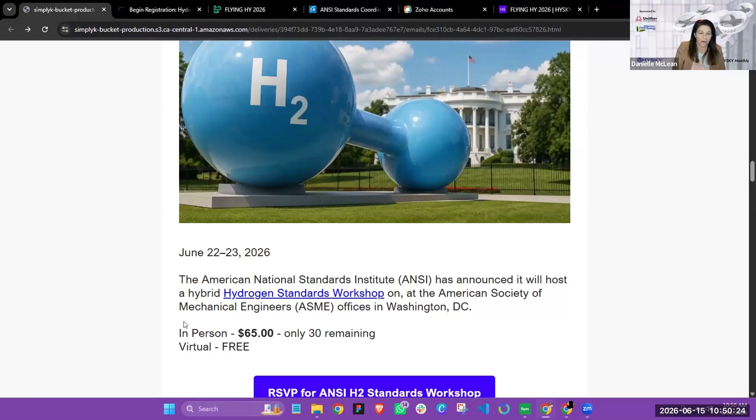Last week, I had the pleasure of interviewing Val Miftakhov, former CEO of ZeroAvia. And in that interview, we talk about a lot of wild things, but you need to watch the whole thing because in the beginning we talk about why he left ZeroAvia, and in the end we talk about what would be different, and he gives specific things that Christine, I even think there's a part of the interview we could use in one of the presentations.

It's towards the end, but he talks about the company basically moving all their operations to the UK, and why, and it gives the United States a very good roadmap on what we can do here. It's short, we only talk about that for maybe 5 minutes towards the end, but I think it would be extremely valuable to hear where they've not really had success and where they have had success, and why. That is something to consider.

We also talk about some funny stuff in here, so it's one of my favorite interviews that I've done. Let me just get you, well, you have this link, but I'll just give you that link.

I can share this with Christian Thiele of SAE International, who'll be moderating the end use applications discussion. And I see David Frank is on as well. So I can make sure maybe Christian will have some ideas on how he wants to carve that in. And it could even be like just a discussion part, maybe it doesn't have to be part of the official agenda, but I wanted you guys to see it prior to the event, so you could even just touch on a couple points.

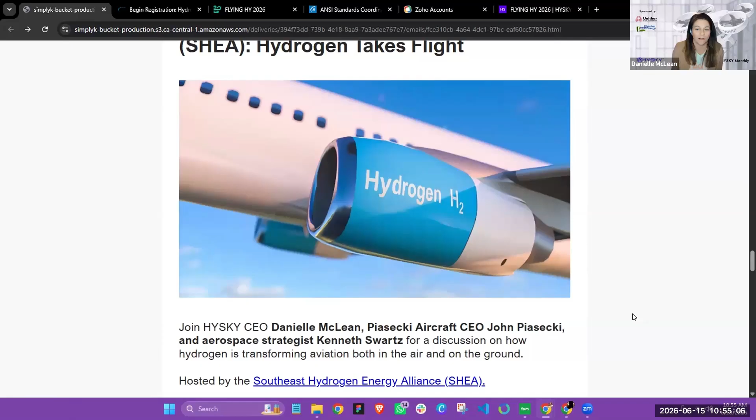But on my 50th birthday, I'll be giving a talk with John Piasecki and Ken Swartz, who also, I believe, is here. And that's going to be a really exciting conversation. Ken's going to talk about what he experienced with United Therapeutics, who's done some really cool stuff. First piloted hydrogen helicopter flight, and all sorts of things that he learned there. So it will be kind of the exclusive on that. And that is on June 18th, this Thursday.

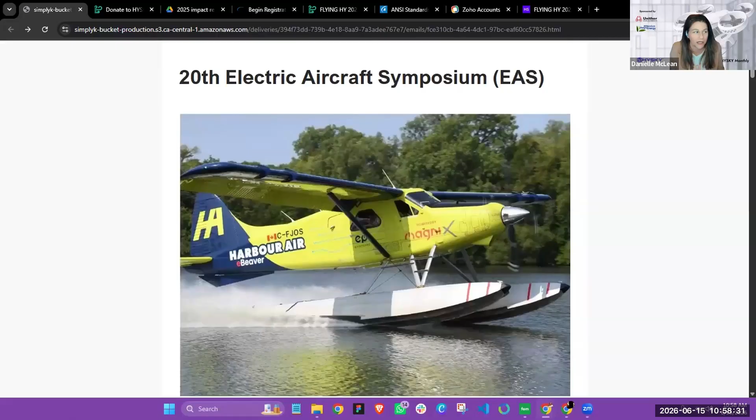Okay, so now I'm going to scroll back up to the top, and that is the end of my spiel. And I will pass it over to Mike. Mike, I'll continue to share. So you can start with EAS and then our speakers for today.

Yeah, so as Danielle showed before, we're doing the 20th Electric Aircraft Symposium. Ken Swartz is really the brains behind it.

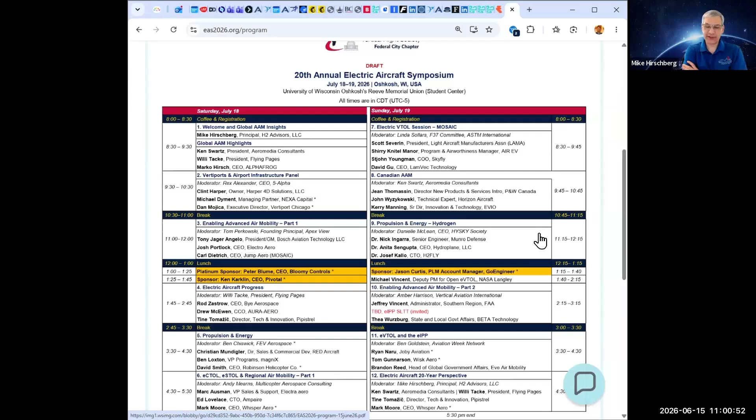And I just want to highlight the program here. This is the online program. We've got this session on Sunday morning on hydrogen that our fearless leader Danielle will be chairing. Nick Ingarra. We got 3 PhDs on this session, so it'll be really great. Anita Sengupta, the CEO of Hydroplane, and Josef Kallo is coming over from Germany to talk about H2Fly. And we've also got some other great stuff.

We've got David Smith, so he'll be talking about the Unither Bioelectronics hydrogen helicopter and also other work that they're doing. You'll see here that Ben Chiswick from FEV Aerospace is chairing that session. And should I go ahead and transition into my intro of our featured speakers, Danielle? Yep. Okay, great. I didn't intend for that, but it just worked out really well.

So yeah, truth in advertising, to state this relationship. I met Ben a couple years ago and was really impressed with the work that FEV does. I'm an aerospace engineer, got a mechanical engineering degree, but I've always really been interested in propulsion, combustion, heat and mass transfer. So this was really a match made in heaven for me to be consulting with FEV. Ben and Satyam will be talking about the past, present, and future of FEV. But I'll give you a little bit here because I'm a nerd, so I like the story behind the story.

They're based in Aachen, Germany, and I know everybody knows Aachen as the seat of the Holy Roman Empire. That's where Charlemagne, or Karl the Great, had the seat. And there's the university there. In English, it's called Aachen University. They developed this combustion research center and spun it out into FEV. Okay, here comes nerd alert. Originally, it doesn't stand for this anymore, but it stood for the Forschungsgesellschaft für Energietechnik und Verbrennungsmotoren, which is a research association for energy technology and combustion engines, which really sums up the basic work they did.

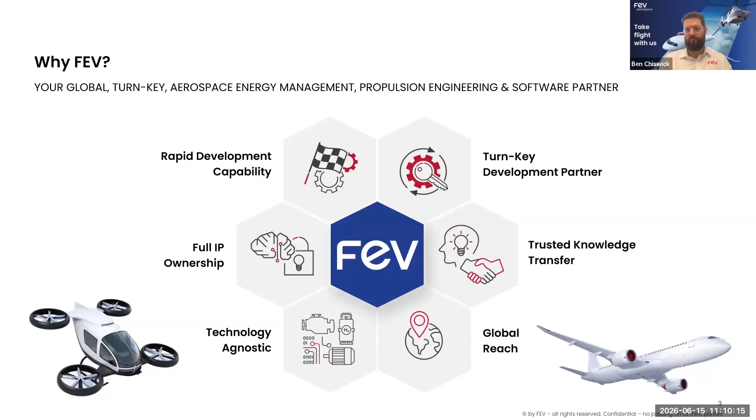All right, this gives a little bit more detail of where we're specifically at in FEV North America, where Satyam and I sit, up just north of Detroit in Auburn Hills. Lots of golf courses around here, as Mike has sort of alluded to. And here we've got around about 400 employees. So we're the biggest campus outside of Aachen, Germany, meaning that we can really deliver across our full range of capabilities of the group, but locally.

Very importantly, we've got about 100,000 square feet of development, test, and prototyping space. That's split across 4 different buildings locally here. And again, flexibility is really the byword there. So we're not a traditional, let's say, test house where you will issue us a test procedure and say, here's my transmission, motor, engine, whatever it might be, go test.

We very much exist in that space where it's the first time that a system is coming to life or the first time it's being integrated into a broader system or with its partner subsystems. And inevitably something's going to go wrong, something might fail, integration issues. So we carry the engineering expertise around us to be able to problem solve those, root cause those things, again, to be that development partner.

This gives just a little bit of a sense of the very recent past. As Mike kind of suggested, we've been around for nearly 50 years now, but FEV Aerospace as a brand is quite new. We've done aerospace work for quite a number of years, but recognizing that we wanted to grow and make aerospace a really strategic focus for the company, we decided to start our own brand and give it that focus both internally and externally as well.

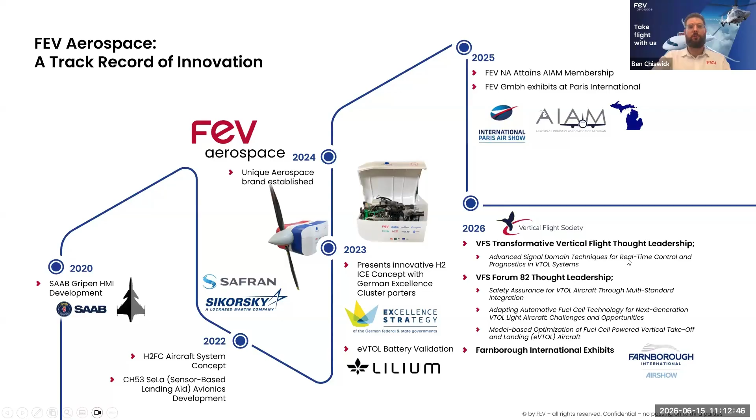So we have a consulting team within the FEV group. Actually, just this year they were nominated by Forbes as one of America's best management consulting firms, that we're quite proud of. But they really help customers with their product strategy initially. So I say we can do a clean sheet, but it's a case of how big is that sheet of paper? What shape should it be? How should people position themselves in the market before we then go and engineer those systems through the normal V cycle?

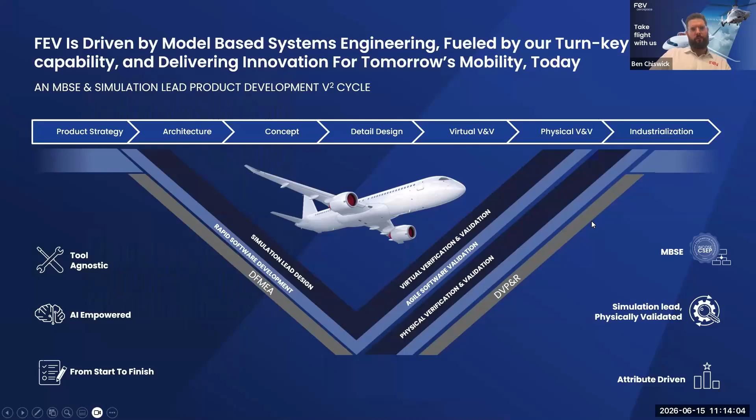Out on the back end, they're doing a lot of operational consulting, helping people with supply chain, helping people set up their sourcing as well. So overall, that gives you a bit of a better sense for how we lay out across the V cycle. Okay.

Feel free to get some water if you need to. Many of us are recovering from illnesses, so it happens. It's all right. I'm on the upswing.

Okay, coming on to what do we actually do within that services world. So it's really divided into 6 pieces. Number 1, electro-hybrid propulsion engineering. So that's really anything and everything motor, power electronics, battery, or integration thereof. Then next, strategic and technical consulting. That's delivered by the FEV consulting arm that I was just speaking to a little bit.

Systems engineering is a huge part of what we do, and I'd already described a lot of the different disciplines that we operate across. So naturally, when we bring multiple of those to a larger program, we have to bring systems engineering to the party as well and really be expert in doing that so that we can integrate across all of those things. And in some cases, we're brought in to be systems engineers for our clients to help them weave their products, programs together, or in some cases, put in systems engineering processes and tools. Also, under that heading, we cover cybersecurity analysis as well, and some functional safety work and support.

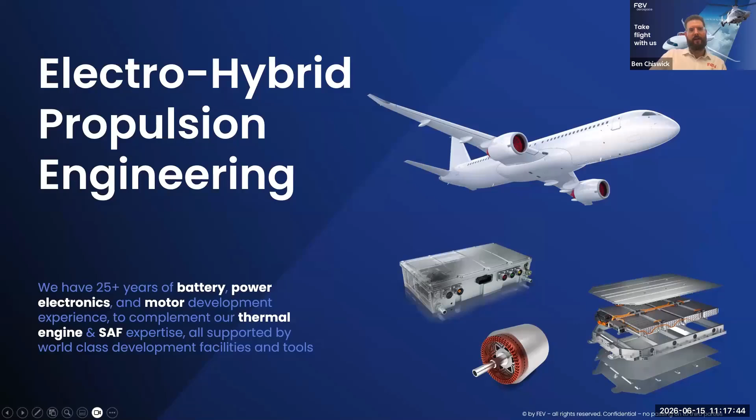I did want to touch on the hybrid propulsion engineering and give everyone a bit of a flavour of that, as it's sitting downstream of the fuel cell. Number 1, battery engineering is a huge focus point for us. So FEV Group actually designed, built, owns and operates the world's largest independent battery test facility, which is located in Germany. So again, that's something we're quite proud of, and it gives us a really powerful not only validation capability, but prototyping capability as well.

So we can do all of the destructive testing that we need to, all of the really difficult niche tests. And that facility also allows us to do very low rate production to bridge between the 3, 4, 5 quantity prototyping and the hundreds that the battery pack suppliers or battery cell suppliers really want to support. There's a little bit of a gap in the middle there, and we often find ourselves positioned in that.

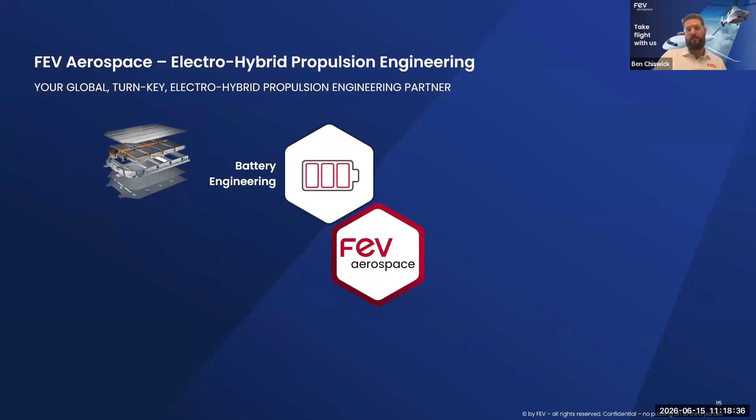Next, copper bird testing. So, really all of the systems that I'd already covered. So whether it's battery, motor controller, inverter, DC-DC converter, motors, we have to do copper bird testing. So being really the glue that fills different gaps that people might have, whether that's in plant modeling, physically setting up multiple motors under test, or motor durability testing, something we're really well positioned for.

The integration of all of these things together is something that we have to do an increasing amount of. Certainly when we think about hybrids, small piston engines together with electrified systems that we're seeing more and more, we have a foot in both camps. So that gives us an ability to not only understand all of those subsystems at a very deep level and plug gaps that people might have in their expertise, but how we integrate those together. It's not fair necessarily to consider system integration as its own discipline because it's interwoven into everything, but equally it deserves its own call out. We see a lot of people have issues there, so we find ourselves called upon very frequently for that.

Sustainable fuel development is something we do a small but growing amount of, particularly in our European base. So we're really well plugged into the Oil and Gas Climate Initiative. So we work with all of the usual major oil and gas suppliers that you might imagine. And really a lot of that comes from our strong lineage in combustion engineering.

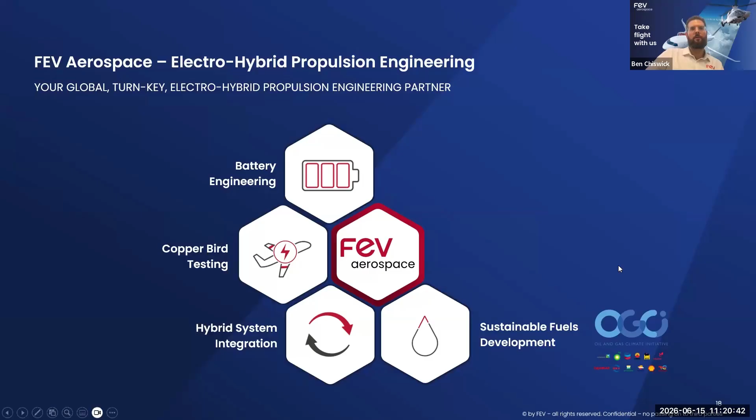As those stakeholders are looking at developing sustainable aviation fuels, it gives us a natural position to help them, whether that's on the consultation side, looking at market analysis, or on the actual fuel development and implementation side too. It's a very small piece, but I'm quite excited about that.

Motor development, of course, makes sense. Then finally, power electronics—again, almost an integration piece. You find a lot of people trying to find COTS systems that either won't integrate well or won't get optimal performance, so we're called on for power electronics quite frequently too.

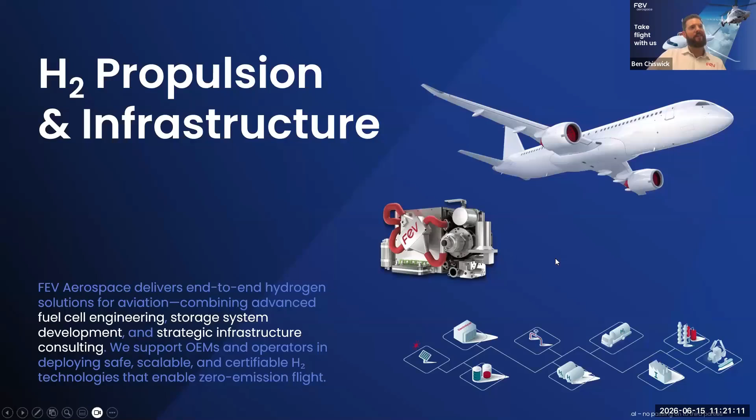All right, getting on to the main event: hydrogen propulsion and infrastructure. What do we deliver here? I know this is a format everyone will recognize, but it's really to underpin how committed to hydrogen FEV is. The reality is we've been operating in the fuel cell space for probably 20 plus years, automotive to begin with.

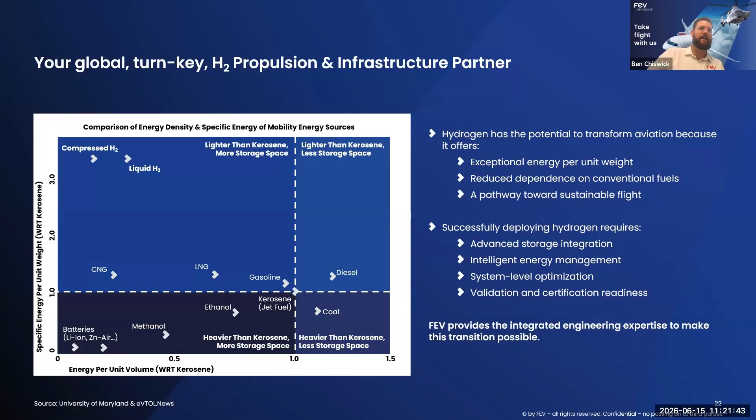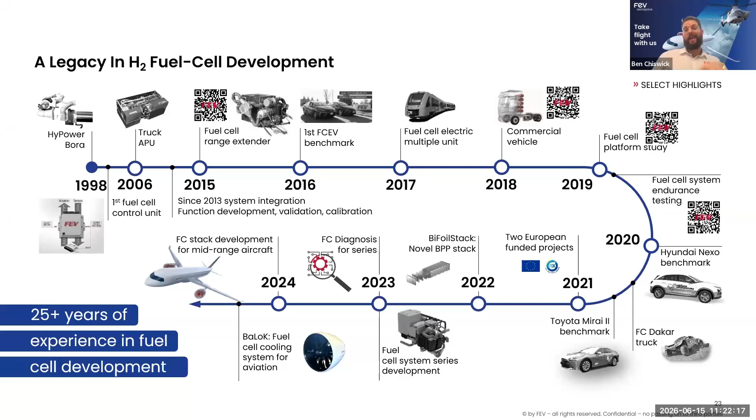So again, a very broad set of expertise across different sectors. Working across all those sectors, exposing us to different tool sets and constraints and ways of working, means we can carry learnings from one sector into another, giving us a much more improved, rounded offering.

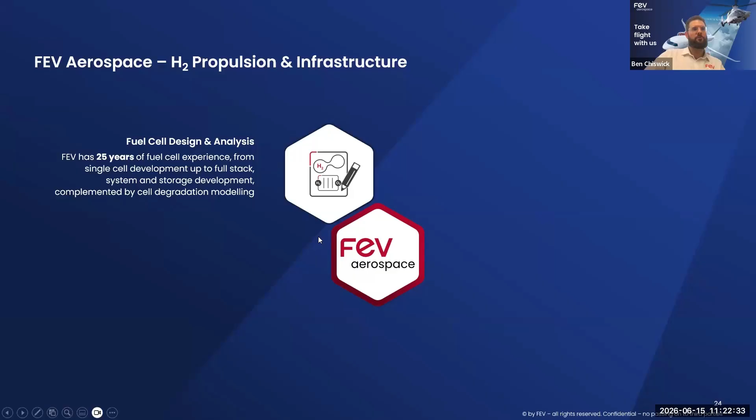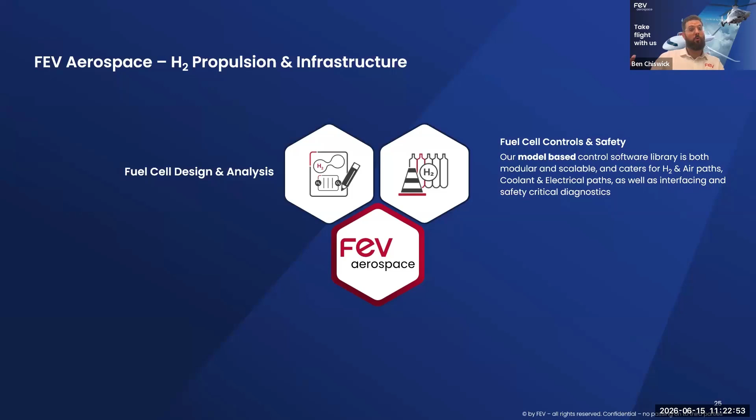Fuel cell design analysis is a big part of what we do and have to deliver. Rounding out our hydrogen offering, fuel cell controls and safety analysis as well. The software piece has to go hand in hand, and we carry a model-based controls software library across much of what we do. We can leverage that to get people to a first operational prototype much more quickly, with lower risk and in many cases lower cost. It just helps us deliver more effectively.

Of course, fuel cell development testing with our global network of development facilities amongst all our subsidiaries. We have a global network of hydrogen-capable test facilities that underpins really all of what we do.

Fuel cell integration involves storage, plumbing, packaging, and supervisory controls of the storage as well—things which often get treated as secondary issues compared to the fuel cell itself. We're really well versed at engineering and integrating those into vehicles, so we're called on quite frequently for that.

Something people don't really know us for yet is hydrogen electrolysis, which is also part of what we do. We have an energy and resources team who essentially do the stationary versions of everything else in the company—stationary battery energy storage, electrolysis as well—and that rounds out our hydrogen offering.

Last but not least, looking at ecosystem development and infrastructure, underpinned by our consulting colleagues—looking at the business side of how the hydrogen ecosystem needs to work going forward, where the weak points are, and ultimately helping our clients position themselves not just for today but within that future ecosystem.

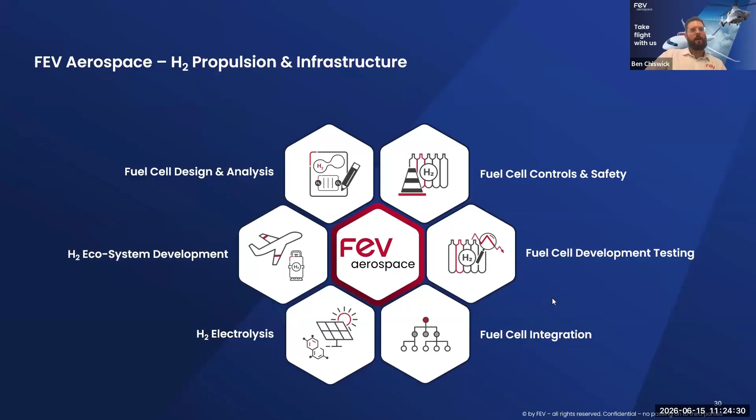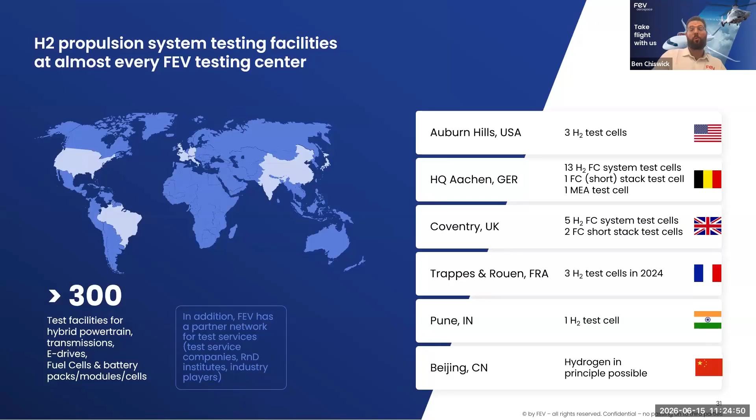That being said, we'll nearly get to the interesting part with Satyam. But beaming this up as just a quick example of some of where we have hydrogen-equipped test facilities right around the globe. We're only going to see this grow as hydrogen grows and the call for that kind of work from within FEV also increases.

The last one from me is really to collect together several pieces I'd already name-checked. We're experienced across a whole number of vehicle types—heavy duty, aerospace, non-road machinery, light duty, passenger car (of course our lineage), marine, rail, stationary—all sorts of different propulsion systems, with a number of different fuel cell systems developed from scratch. Benchmarking and testing is also a big part of what we do, whether cost benchmarking and teardowns or performance benchmarking. So we deliver a very rounded service there, which helps our consulting team position customers where they want to be.

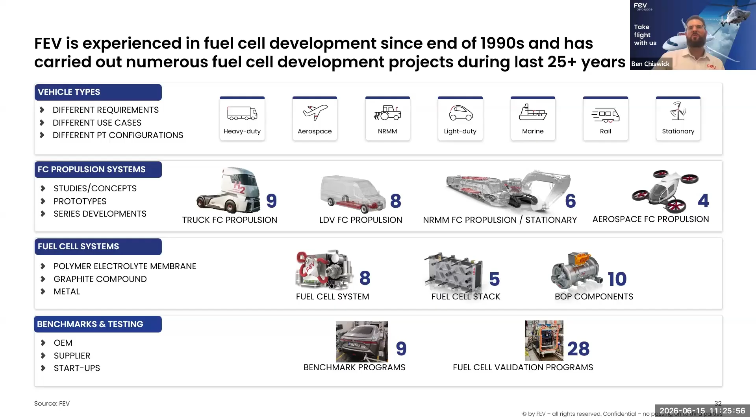So it's not just a case of here's what the technology roadmap looks like, but here's the roadmap supported by the technology that's incumbent today and how that's all operating, what the cost points are, what its availability is, and what its performance is. And of course, validation programs as well.

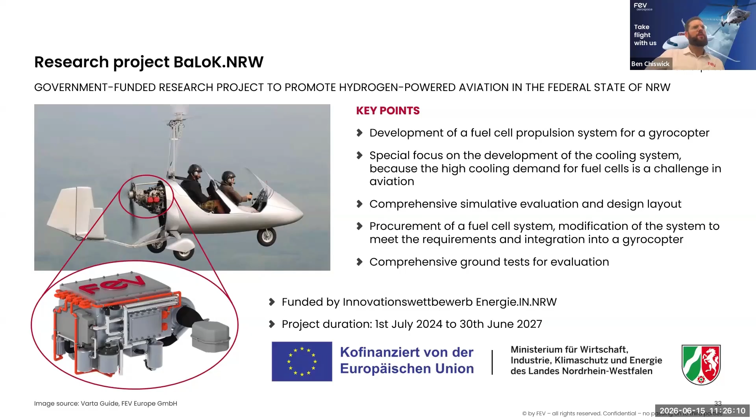So with all of that being said, I'll round off now with a couple of examples. I'll flick through these quite quickly. We'll just see a few different case studies of things that we do or are currently involved in.

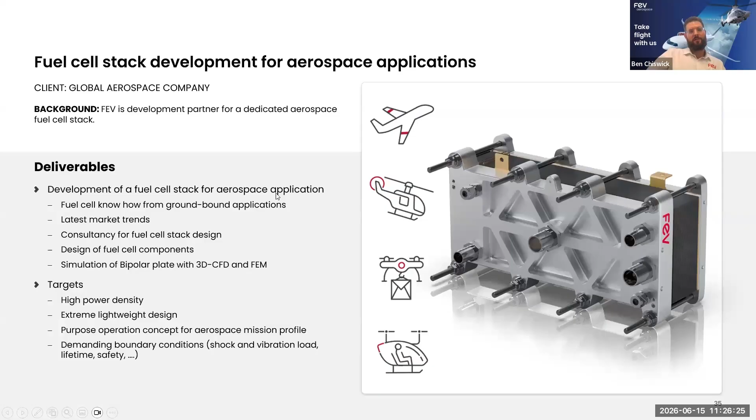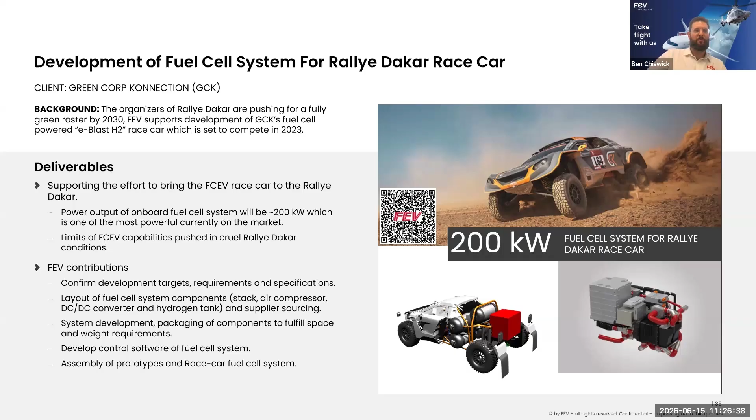I've actually done a fuel cell for the Paris-Dakar Rally, so of course this is quite close to my heart, being from motorsport. But again, it just shows you the breadth of what we do.

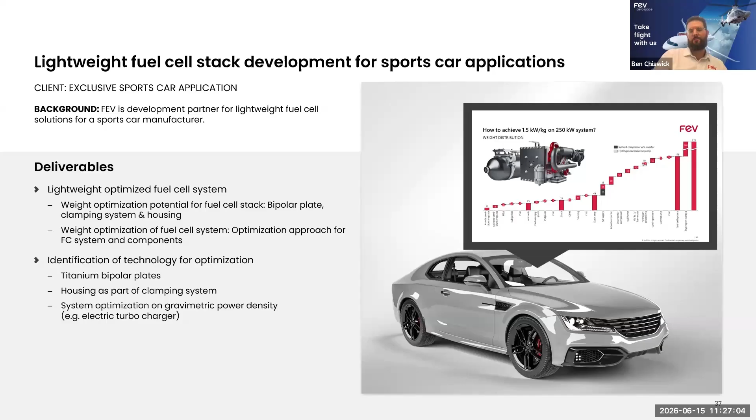And then equally here, an exclusive sports car application, but for a very, very high-end OEM that's in Europe. So again, it just shows you the full breadth of what we do. And again, not a huge lineage necessarily in aviation hydrogen, but it just shows you the range of different problems that we've tackled and ultimately the tool set and experience that we've got to bring to bear to tackle those.

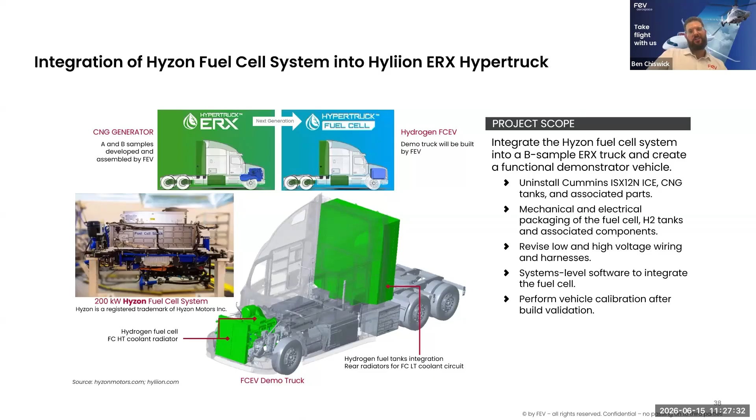Last but not least, this is an example of an integration program that we can share with a company called Hyliion that we did a lot of work with here in the US, where we converted a fleet of their trucks to hydrogen fuel cell and did all of the surrounding subsystems for them, all of the vehicle level validation, and again, kind of shows you around the hydrogen storage system and controls and how we operated and worked.

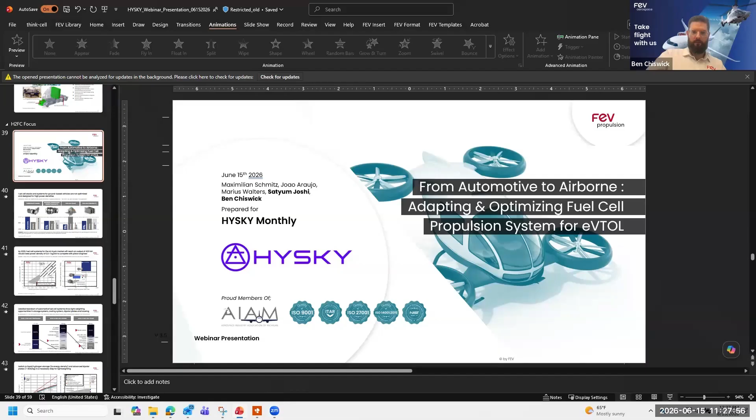Okay, alright, yeah, first of all, thanks Mike for the kind introduction. I do want to recognize my colleagues who actually were the lead authors for some of the content that I will be showing today. Max and Joao, they worked hard on some of the work that we did with regards to the specific adaptation of automotive fuel cells into propulsion systems for aviation applications. And we also are highlighting that it's not just adapting, but how do we optimize? So there's content that I will be showing on not just adaptations, but then how do you optimize the system for aerospace applications?

So let's start here with what are we competing against. So we've got turboshaft engines, really high in power density, acceptable level of efficiency. And then you have internal combustion engines, or piston engines as we call them, slightly more efficient, but not as power dense, work really well in that 200, 300 kilowatt power range. And at a specific power level, they tend to be a little bit more efficient.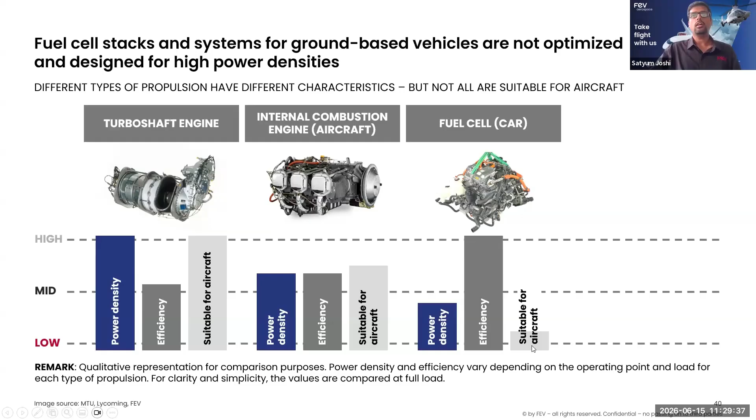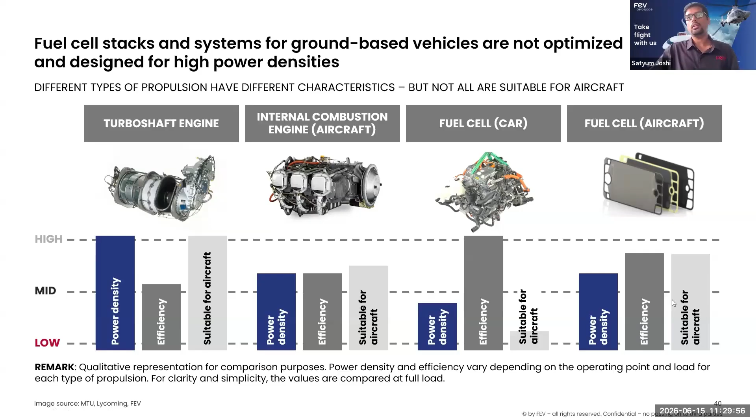So if you compare those two against what automotive fuel cell systems are, the automotive fuel cell systems are very low in power density compared to these two propulsion system options, but obviously quite a bit higher in efficiency, not really suitable for aircraft application. And what we're trying to get to is a target of at least a similar power density as the piston engines with better efficiency. So that's kind of the goal of some of the work that we've been doing, and how do we make these more suitable for aircraft applications.

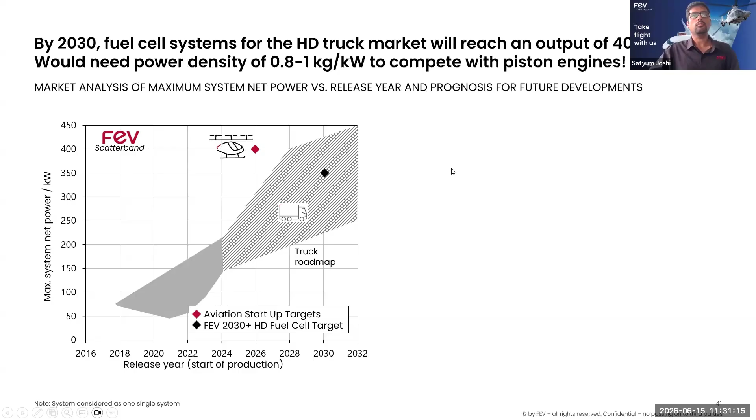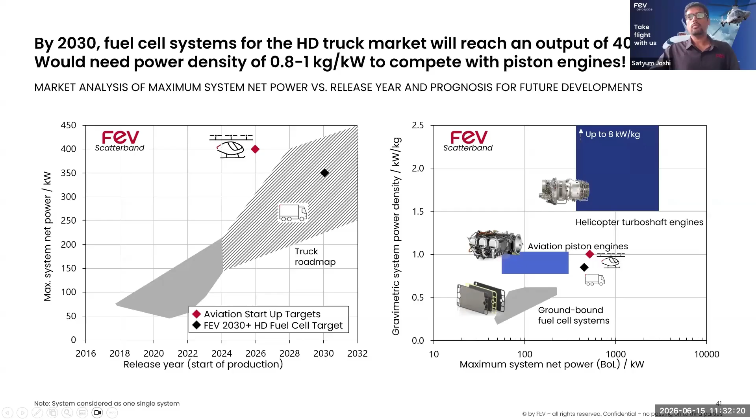Okay, so we want to get more power density. Let's start with where the weight is coming from for a fuel cell system.

We did teardowns of multiple fuel cell systems in the automotive space, and we picked the one that was the latest technology. It was about a 100 kilowatt fuel cell system, 125 kilowatt stack, and that weighs about 357 kilograms along with its hydrogen storage system. If we look at the breakdown, the fuel cell is 60%, the storage system about 40% of the total weight.

If we break down the fuel cell system into its different components, the stack assembly is the biggest contributor, followed by the cooling circuit and the cathode system, which is the air side, as the top contributors to the weight.

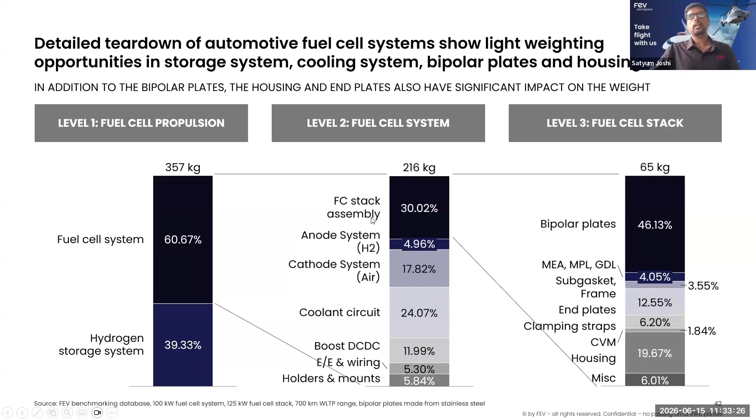If we further break it down and look at the details within the stack assembly, you have bipolar plates contributing 46%. Another big hitter is the housing itself, and then the end plates and frame.

So we looked at this and tried to understand what are the low-hanging fruits, where can we optimize the most. We identified the hydrogen storage system, and I'll talk about how we address each of these: the hydrogen system, the thermal system or cooling system, the bipolar plates, and the housing design. These are the key focus areas in all the projects we've been working on to get more power density by focusing on these subsystems.

Starting with the storage system, it is relatively straightforward. Most automotive, heavy duty trucking, or even some locomotive applications were using compressed hydrogen. Some of those applications have also transitioned to liquid hydrogen storage, so that would be a rather easy step to do—move to a liquid hydrogen storage system, still operating in that 1 to 10 bar range. One challenge, of course, is the boil-off and some losses due to that, but it's still manageable.

And obviously, the huge power density increase, or energy density increase, you get from just switching to liquid hydrogen storage outweighs that hydrogen boil-off loss.

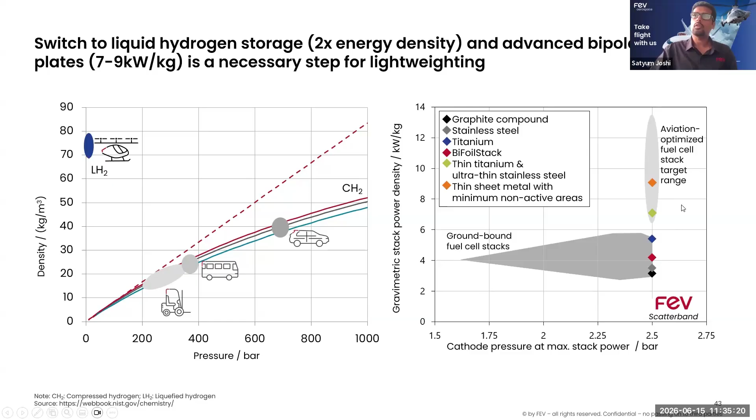The other area I mentioned was the bipolar plates, and what the new technology is there, and how we can get to more lightweight stacks. Most ground systems use stainless steel or some kind of graphite compound if you're looking for more durable stacks. Bifoils is kind of a hybrid between stainless steel and graphite compounds. And then titanium really pushes these systems, improving the power density as well as the durability.

The next step is to then look at ultra thin and thin titanium. These involve more advanced manufacturing methods like hydroforming, and that is how you're able to push these to 7 kilowatts per kilogram power density. Then really thin metals with minimizing the non-active area—so design optimization combined with thin sheet metal combined with advanced manufacturing are some of the ways we believe we can achieve this. The green diamond here is where we have seen some work already, but really the goal is to achieve the target of 9 kilowatts per kilogram.

Then switching to the housing side. Here's a couple of pictures on the housing in the automotive space: the Mirai housing design, and the design from Refire Prisma fuel cell as well.

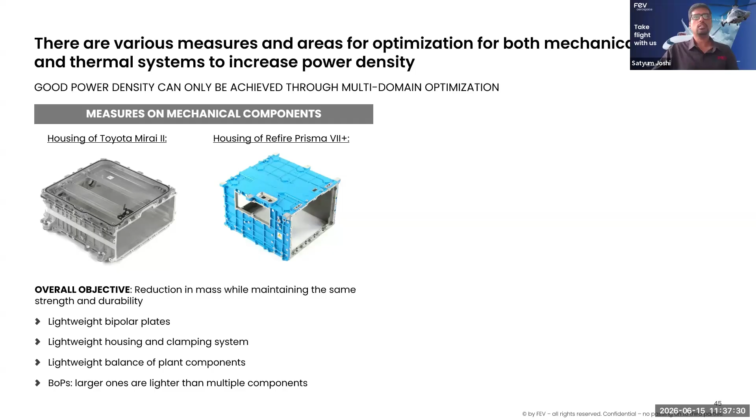There's already, as you can see in that design itself, opportunities for lightweighting and some steps that the OEM already did take. But in general, there's always opportunity for improvement, and we found areas for lightweighting in the housing and clamping system, balance of plant components, and those are, again, just doing more iterations with your design, CFD, CHT analysis, structure analysis to get to more lightweighting.

The other one that's a big one is, of course, the thermal system. As many of you are already aware, fuel cells are unique in terms of how they reject the heat as compared to the piston engines and also the turboshaft engines, where a lot of the heat is carried in the exhaust. Fuel cells have very little heat that goes out through the exhaust, and most of it is rejected into the coolant. So far analysis has shown that it may not be the best way to match the peak power demand to the peak power output of the fuel cell.

You want to oversize the system a little bit to get the best, let's say, trade-off between the fuel cell weight itself and the weight of the thermal system and the efficiency of the aircraft itself. So it's a system level problem and has to be looked at with some tools, which I will talk about in a bit. So here's two charts.

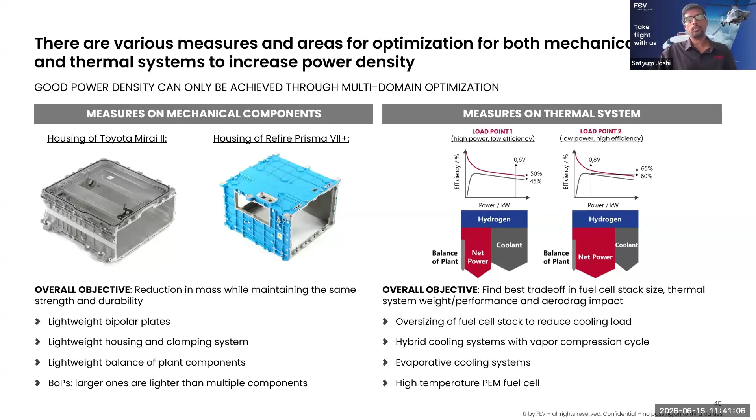So the idea here is how can we scale up the automotive fuel cell and give some of these manufacturers who have been producing fuel cells in the automotive space for many years now a path to provide their products for aerospace applications. Another critical area of adaptation is compressors. So most of the fuel cells in the automotive trucking space are single stage, good for 10,000 feet or so. But as we start to look at some of the higher altitude products in aerospace, you do need a multi-stage charging system, and so that is a major consideration.

But in aerospace that is kind of a must-have to recover the exhaust energy and maximize system efficiency. Okay, so

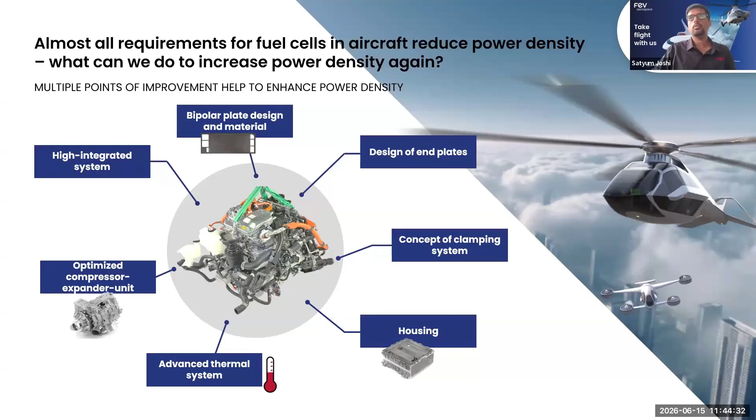Bipolar plate design and material, I talked about that. Along with that, the housing design, clamping system, and end plate design. So these are just fundamental design optimizations, they just need more loops in the new environment, along with analysis. Thermal system, I also touched upon that. Compressor unit and expander unit optimization. So these are all the measures that we identified and would be key to adapting the automotive fuel cell system to aerospace applications. Okay, so that was on the fuel cell level.

If we look at the propulsion system as a whole, it's got two other major components. That would be a battery pack to handle some of the transient loads, and of course the storage system. So when we generally look at these problems, coming from a very research-oriented company, we like to have the right tool set to make sure that we capture all the physics that is happening within all these systems.

Because like I mentioned before, if you just focused on power density of the fuel cell system, you size it small, but if you look at the cooling system impact of that, that may not be the right decision. And then further, the cooling system impact on the aerodynamics of the aircraft, that's also another impact. So the problem has to be looked at on a system level, making sure that you're able to model effectively each and every component of the propulsion system.

So this was a case study that we presented at Forum 82, focusing on how we can set up a multi-physics model of the propulsion system and the aircraft and do an optimization study. And we just did phase one of this. It's got a couple more phases, but it's taking us in the direction of doing system level optimization using modeling.

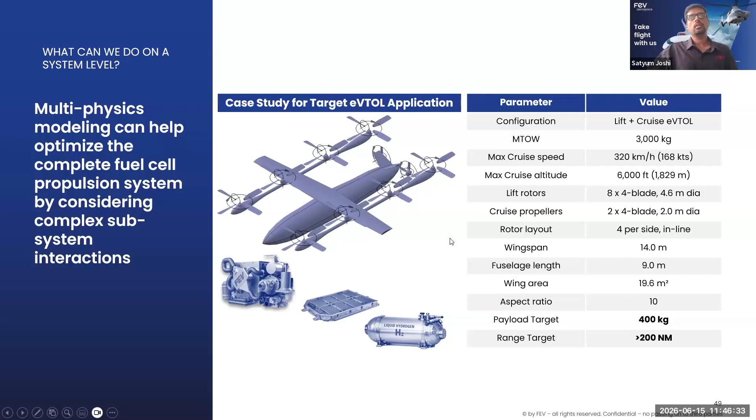So some specs of this aircraft: it's got eight lift rotors, two cruise propellers. We were targeting 400 kilograms of payload and a range of 200 nautical miles, and maximum takeoff weight of 3,000 kilograms. So about a four-seater aircraft, more for intercity travel.

The tool that we developed here was leveraging a lot of our know-how in the other space and taking the tool that is so far the leading candidate, which is GT Suite, and all of the work that we've done with regards to fuel cells and other propulsion systems. On a system level, this is a great multi-physics modeling tool, and a lot of our models are validated against the benchmarking we have done for different fuel systems, e-motors, batteries, power electronics. We have performance models from a range of vehicles and aerospace application components that have fed into this database.

So on the right side here, I have GT Suite, which does all the propulsion and thermal system modeling. And then on the left side, what we leveraged was an open source aircraft dynamics model called SUAVE. That's from Stanford University, and it's available open source. So we tried to link the two so that we get the most realistic or high fidelity dynamics of the aircraft model. And from our side, we have all the details of the propulsion system and thermal system model.

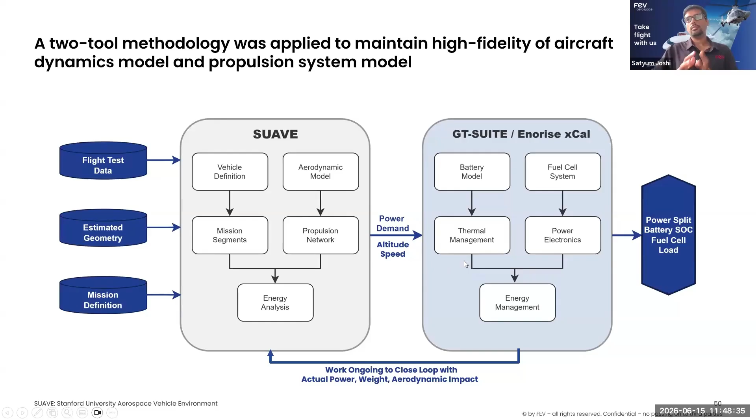Right now, it's a one-way coupling, so you get inputs of flight data, geometry, mission definition, and that feeds a power demand into the propulsion model. And then also altitude and speed, which impact thermal management and fuel cell system operation. But we are working at the moment on closing the loop here so that we can do feedback on actual power, weight, aerodynamic impact. That way, this whole tool chain can become our go-to tool chain for system level optimization. So the first step we did here was make sure that the aircraft dynamic model was validated.

We had some test data available for about a 100 nautical mile route. And here I'm showing power on a normalized scale, so you can see the takeoff portion going up to maximum power on the lift motors, and then slowly transition into the cruise climb phase. And then you enter your cruise phase here with the cruise motors, then descent, and finally do a hover before you land. So those were the different flight phases.

And for each of the flight phases, we calibrated the model so we can match the aircraft dynamics to our test data. And overall, this was a very well correlated model. The specific flight was done at the max altitude of 6,000 feet, max cruise speed of 320 kilometers per hour, about 168 knots. So we're very happy with the aircraft dynamics calibration.

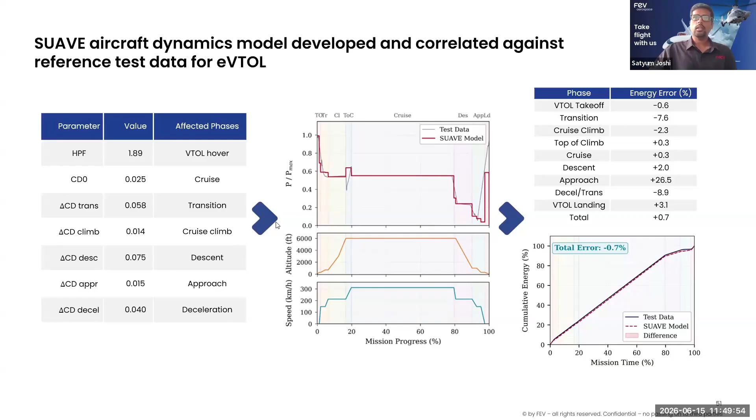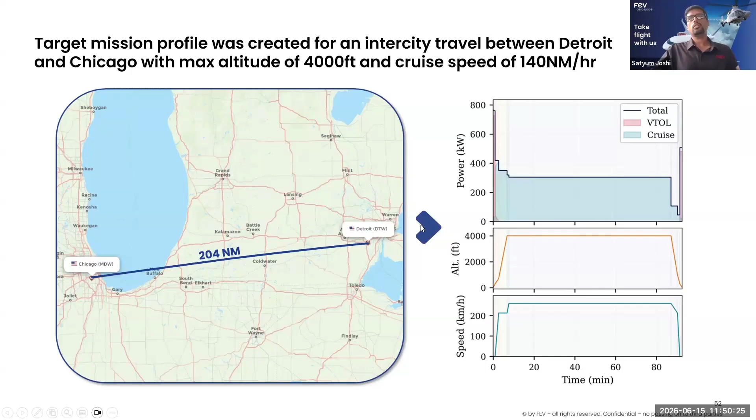We took that same aircraft dynamics model and tried to project what would be a target mission profile for an intercity route between, let's say, Detroit and Chicago. Our goal was to target more than 200 nautical miles, and this was right around that. And using that, we created a new power target profile. So that's very key for doing any kind of optimization. You want to know what your mission profile is, and this is what we then use this tool to predict or calculate for us.

Some more details of the propulsion system model. So it's got all the different elements in here. So fuel cell modeled as semi-predictive. These approaches have come from our years of experience of modeling these components. Instead of getting into the details of solving all the electrochemistry, there's easier ways that are more, let's say, robust and also closer to reality. And that's why we use certain models. So fuel cell, semi-predictive, high voltage battery using a two RC branch equivalent circuit model, motor inverter. Most of this data comes from our own teardown analysis and benchmarking for loss maps, for rotational dynamics, inertias.

BMS, thermal model. So for the thermal model at the moment, we've been using what is called a semi-predictive thermal model, where it looks at the heat rejection and calculates the pump and compressor power consumption. And later on, the plan is to make it more detailed. Energy management controls, so determine how best to utilize the battery pack, how to balance between battery and fuel cell power. So that split is defined by our intelligent controller, and then a pilot model to make sure that we can follow the power request profile.

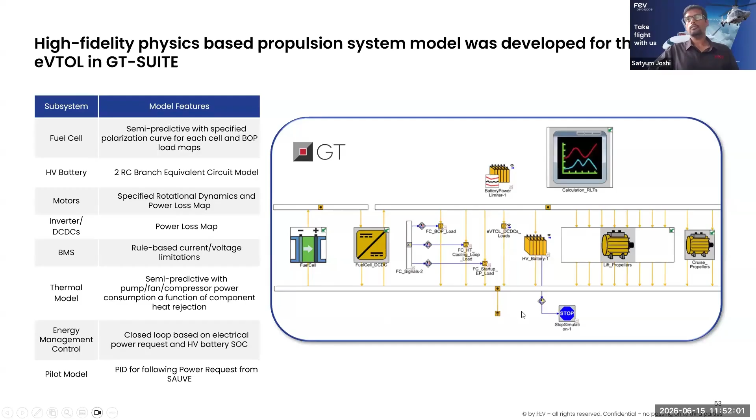Before we got into doing an optimization, we want to understand what's the best architecture or the leading architecture before we get into doing a more focused DOE. And many of the systems use, let's say, an eVTOL platform and try to add certain range extender components. And that would be kind of a battery dominant architecture where you're using a high energy density battery and then adding on a fuel cell system to get more range. And the other one would be fuel cell dominant, which would be keeping the fuel cell as the leading propulsion device and then just adding some battery capacity to handle the transients and manage load transitions on the fuel cell. So that's the fuel cell dominant.

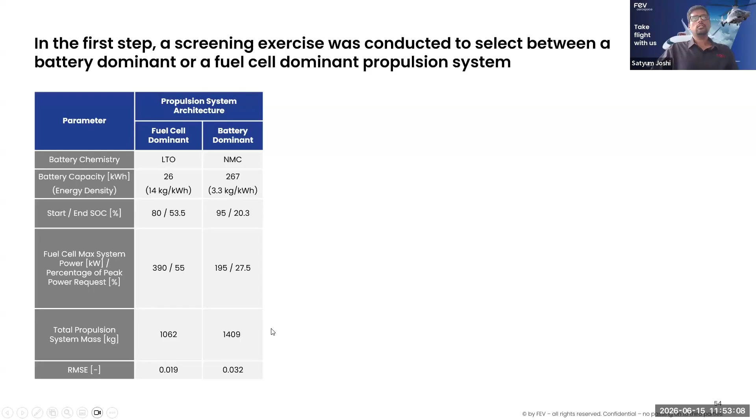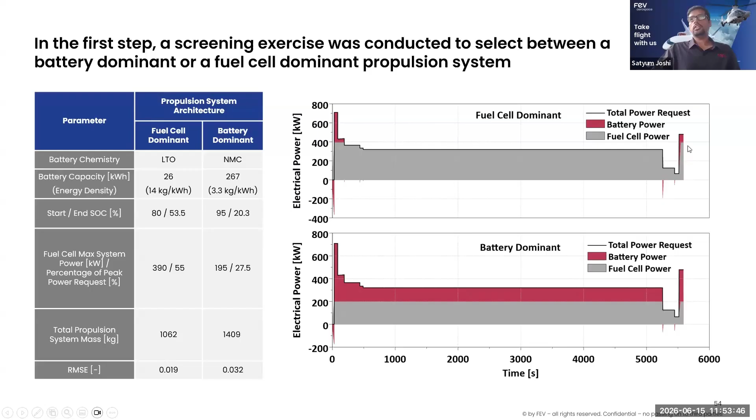And right off the bat, when we looked at the propulsion system mass calculation, there was a significant difference, about 350 kilograms between the two for a given range that we were targeting. And very clearly when we ran the simulations, we saw the same thing. In a fuel cell dominant variant, you're running the cruise pretty much all on fuel cell power. The battery is just there to support the takeoff portion and then the hovering portion before landing. Whereas in the battery dominant variant, you're consuming the battery, and the fuel cell is pretty much running at its best power point the whole time. And this approach is not really favorable from a weight perspective, and that's why we decided to move forward with the fuel cell dominant architecture.

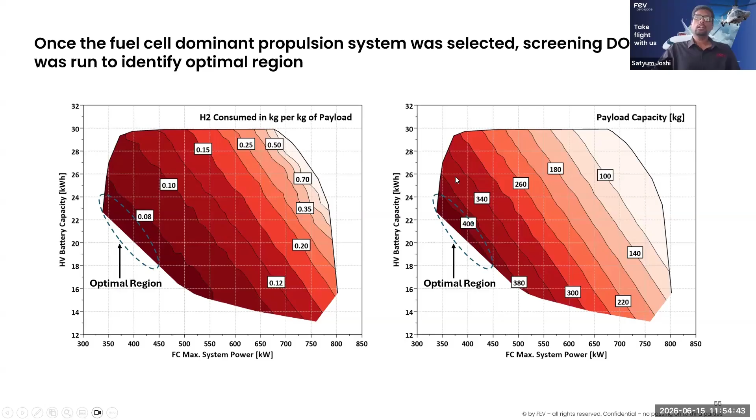So once we figured that out, we ran what we call a genetic algorithm optimization. Just on a high level, I'll explain that it is just a way that our tool allows us to explore the right sizing and understand the different trade-offs that we would see as we're modeling the complex physics of the system. So it's very important to set the model correctly, and then you can, of course, do a lot of these optimization algorithms with it.

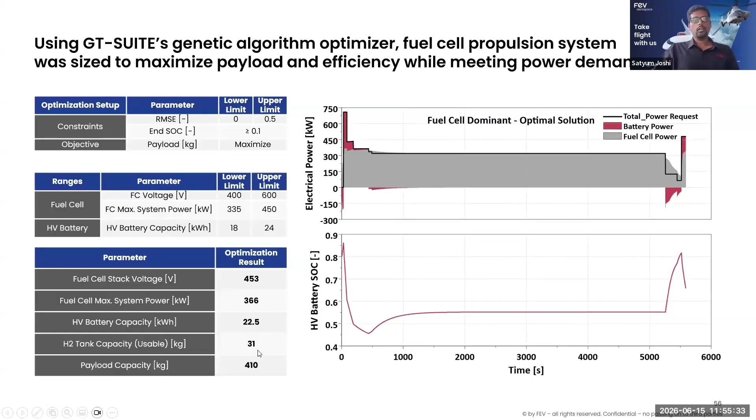And here it resulted in showing that, okay, from a fuel cell perspective, we wanted a stack voltage of 450, max power 366, battery capacity of 22.5, 31 kilograms of hydrogen, and that would give us a 410 kilogram max payload for this duty cycle.

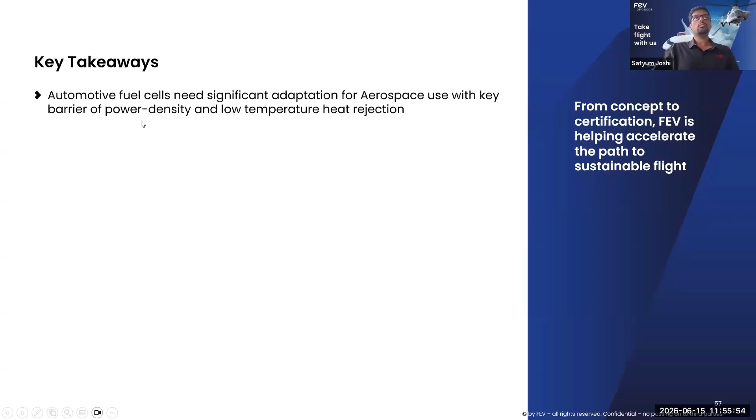Okay, towards the end of my presentation, I do want to leave a few minutes for questions. Key takeaways: automotive fuel cells need significant adaptation for aerospace use, with key barriers of power density and low temperature heat rejection. The key areas we identified for power density increase are storage system, the bipolar plates, housing design, and thermal system.

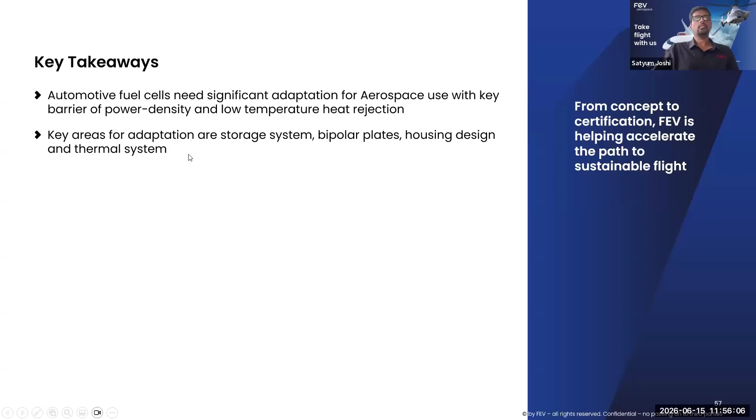You do need to take a holistic approach as you're looking at design optimization. So, like I said before, sometimes oversizing a stack will lead to better efficiency, can lead to a smaller thermal system, lower aero drag. And for the system level design optimization, try to have a modeling framework that captures the details of all that is happening, the aircraft dynamics, thermal system, propulsion system as necessary, and make sure these component models are scaling to your best knowledge and to the specific physical phenomena you're trying to find a trade-off between.

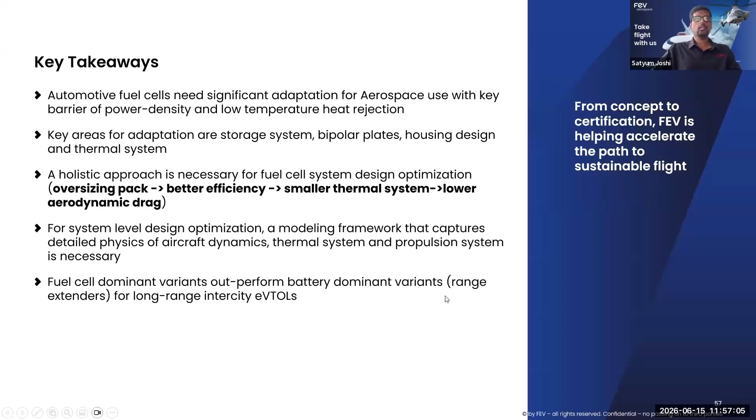And then one of the key takeaways from our analysis was that the fuel cell dominant variants are always outperforming the battery dominant variants, especially for long range intercity eVTOLs. And for a 3,000 kilogram eVTOL, we found that about a 340 to 380 kilowatt fuel cell system size, a 15 to 25 kilowatt hour battery, and 25 to 35 kilograms of usable liquid hydrogen storage is where the optimal is.

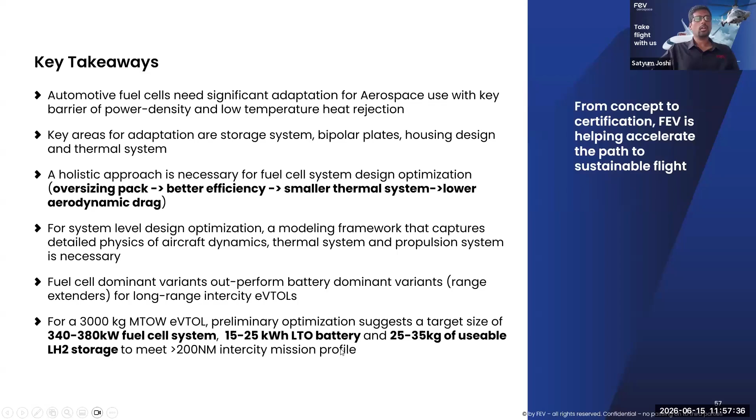And we'll be working on refining this modeling framework to really find that answer: what are the optimal specs of these different components and the thermal system that would go along with it. So with that, I'd like to conclude, and we'll be happy to answer any questions that you may have.

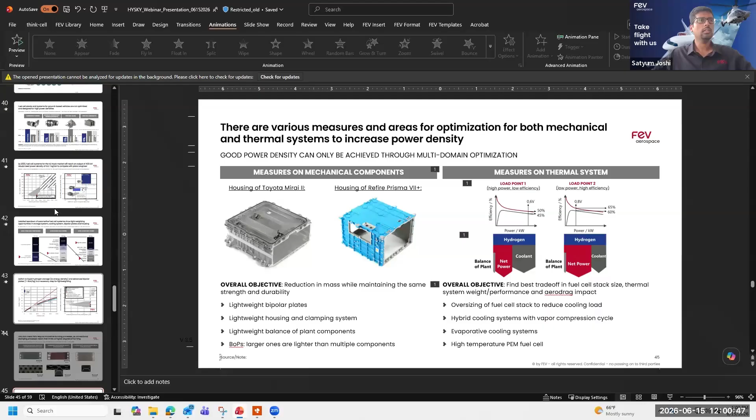That was stainless steel, but I can check that. Most commonly, so let me see where. Yeah, this one right here. My understanding is that this was right here, made from stainless steel. Okay. Sorry, I missed that in the fine print. My apologies. No problem. Yeah.

Out of curiosity, what was the voltage of the stack too? Because when you were mentioning part of the weight of the fuel cell system, I'm just trying to picture how many cells they put in there, for that influencing the weight. Yeah, I would say it would be a 250 to 300 volt system. I would again have to go back and check what our number was, but this is just one of the stacks, or one of the fuel cell systems, that we benchmarked. We decided to take this data because we thought this was the most recent design, more optimized, and probably the lightest among all the other systems that we benchmarked.

Yeah, we have done specific humidifier testing and modeling, but of course we don't make any components, so we offer these kinds of services to tier ones who are developing these fuel cell systems or OEMs who are trying to understand the systems better. So yeah, we have tested them, we have modeled them, and also support tier ones in their design, but at the moment we haven't really explored how to adapt some of those for aerospace applications. Thank you.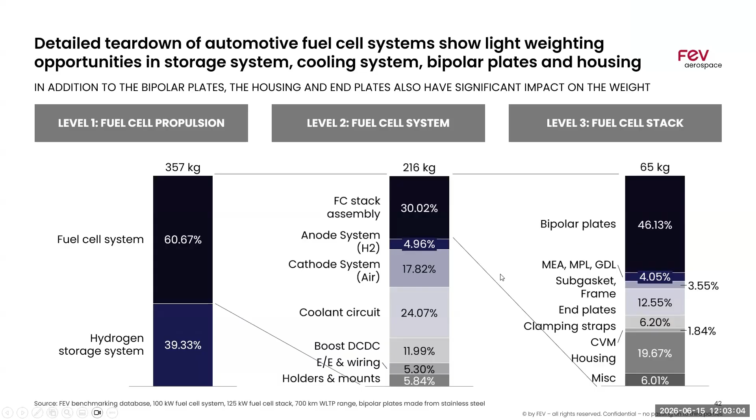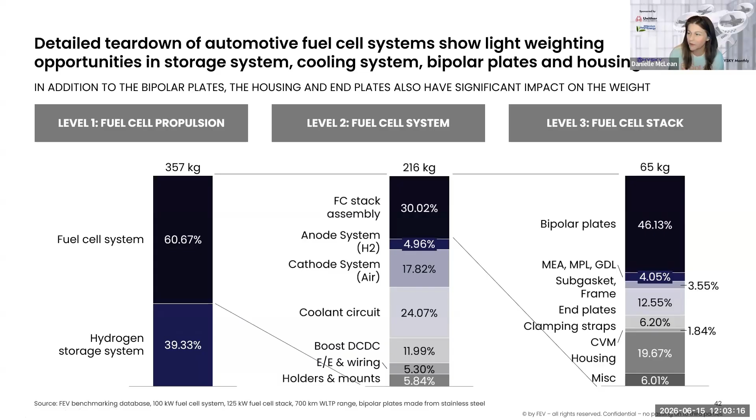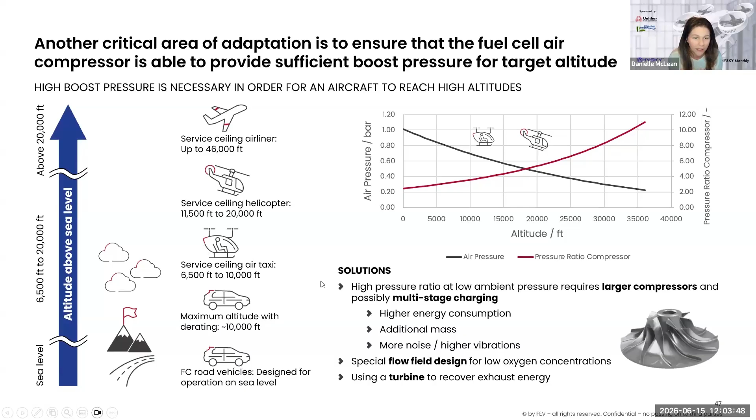Great questions. Okay, I just have a couple comments and then one more question. On the plot where you had altitude, I'd be interested to see it up to 60,000 feet. I'd just be curious to see if it continues on that path or does anything different. And another thing I would like to see is on the chart a few back, where you had the different pressures for different types of vehicles, if you can go back, maybe 3 or 4, it was before this.

Okay, this one. I'd be curious to see where fixed wing falls. It looks like a VTOL, and maybe it's inclusive with fixed wing. If it isn't, I'd be interested to see where a small fixed wing 1 to 4 passenger aircraft would fit. Okay. By the way, great chart. I love this. This is one of my favorite charts. I've never seen this, and I can't see where it came from, but I will when I look at the slides. So I'm definitely going to be using this.

Okay, Doug, last questions, and then we'll wrap it up. Or did you already ask them? I asked about the membrane. I just wanted to make a comment about the graphite plates. It's a no-win. You can't put graphite plates into a fuel cell stack without problems with the fragility. I worked with the company JTech Energy on that, and we finally went to stainless steel plates on the end plates. So I would stay away from graphite altogether. Yeah.

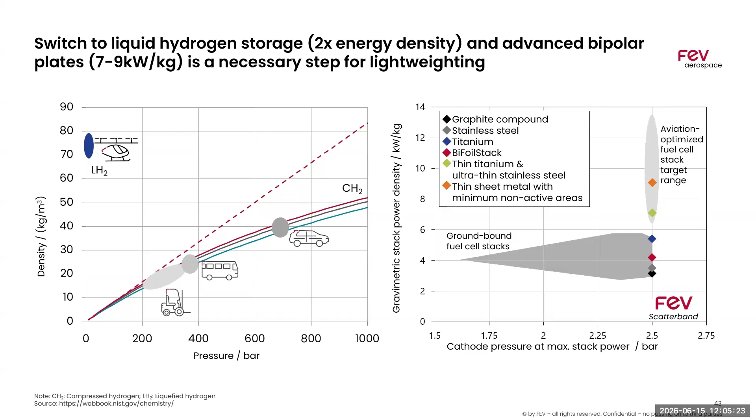It's being added as a compound for getting more durability. That was the only reason folks were using it. It still has the backbone of a kind of metallic plate. Awesome. Very good. That's the only comment I had about that, because I had actual lab experience with it, and it was a failure. Thanks, Doug.